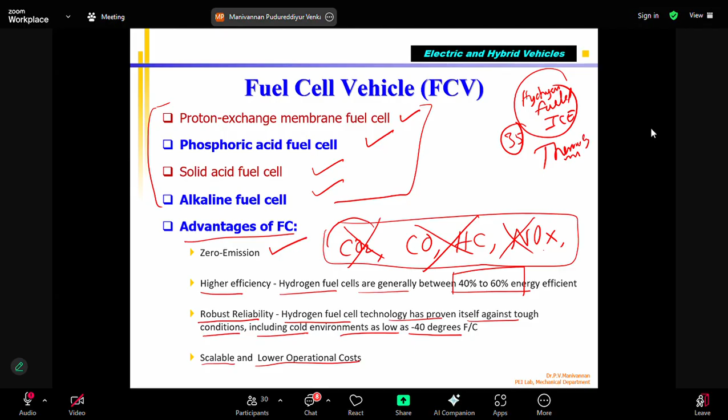If you increase the size of the fuel cell, the volume of hydrogen going in, you can produce more voltage, more current, bigger output. That's scalable - you can make it bigger. It also has lower operational cost compared to battery, considering maintenance and other things. These are a few reasons why people are trying to go to fuel cell compared to battery based electric vehicles.

Please note I gave 4 or 5 positive points, but there's a lot more to consider. In the universe, nothing is completely good, nothing is completely bad. When we say someone is good, say out of 10 points, 6 or 7 are good, 3 or 4 are bad, then we say that person is good. If someone has 8 good qualities and 2 bad, we say he is very good. No person will be completely bad with zero good things, all 10 bad, and similarly no one has all 10 good with no bad thing. You won't find anybody like that in the world.

But when more good things are done, we grade it: good, very good, excellent, something like that. Even excellent fellows still make 1 or 2 mistakes - maybe 8 or 9 good things, 1 or 2 mistakes. Similarly, any technology, whether battery, fuel cell, or IC engine, has good things but also has limitations. We'll see those limitations later when we talk about fuel cells and batteries.

Now that we've talked about why we have to go for hybrid electric vehicles, and explained the reasons over the last 5 to 6 classes - internal architecture, layout, technical details - not just introduction but many technical layouts too. I'm saying this because in the exam you can expect questions on what we've talked about till now. The midterm exam is coming in the middle of March, so that's why I'm emphasizing this.

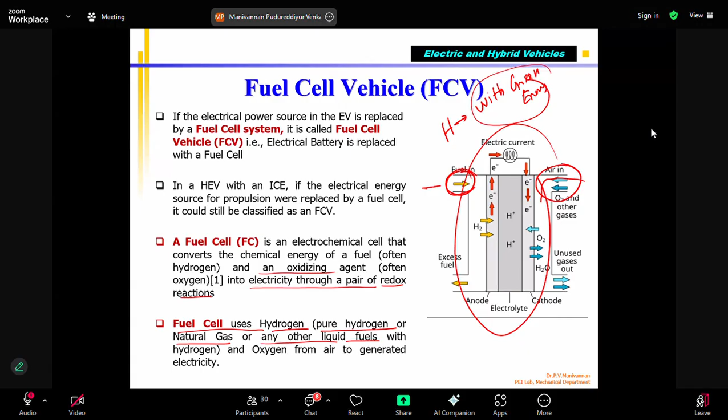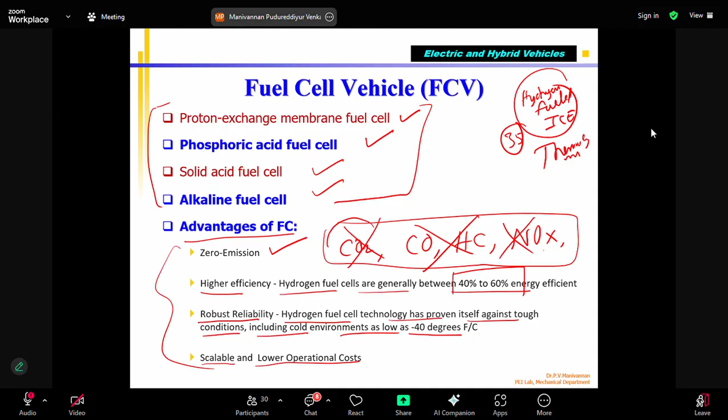Now I wanted to start diving deep into the modeling of electric vehicles, hybrid vehicles - how to find what should be the power, how much power is wasted, transmission, all these things one by one. First, let's talk about modeling and simulation, which has become very popular nowadays.

We saw this in the mechatronics course too. Modeling and simulation became very popular because making a physical prototype takes a lot of money, time, and effort, and something can go wrong during initial prototype testing. For example, with a nuclear reactor - if you don't control it properly during design, an accident can happen, emitting radiation that's dangerous for nearby cities for at least thousands of years. So they say nuclear reactor design should be done through simulation.

Now this is possible. Some 20 years ago, you did not have computers or software packages for this. Now think of bigger aircraft - new aircraft, bigger machines. Making a physical model may take too long. As I told you in mechatronics, for example the A380 Airbus, or Boeing 777, 787 - for the last 20 years, new designs are done through modeling and simulation, which we call the mechatronic way of design. Every component is modeled using mathematical equations, and you run the program - what we call simulation - vary the parameters, optimize the design. Only when everything is okay do you make the physical prototype.

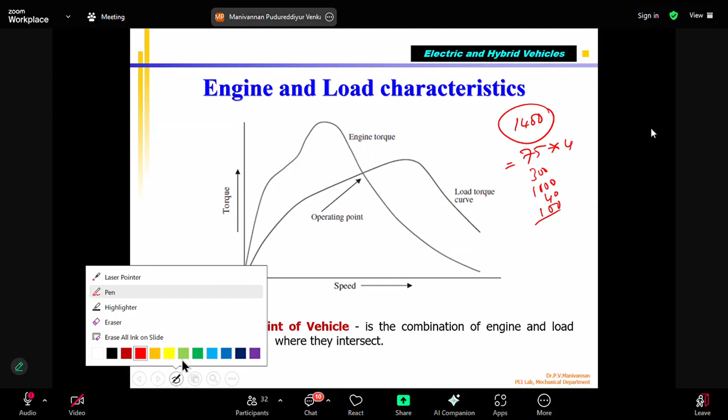We are talking about the mass of the vehicle, due to which there is an inertial load acting on the 4 wheels, multiplied by gravitation. That is going to happen.

Now, when we talk about the vehicle, who is going to drive it? The engine. The engine has to produce torque, and this is the engine torque, TE, which is trying to do this.

We know that as the throttle varies, engine speed varies. From 0 to 100% throttle, if I vary, my vehicle speed varies from 0 to 100 kmph. So as throttle varies, engine torque increases as engine speed varies, and engine torque is not constant, as we already know.

Similarly, the load torque. We already talked about various torques. These torques are also not constant.

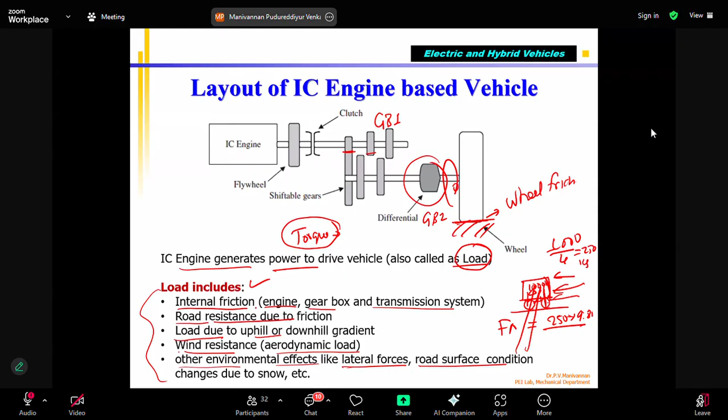For example, wind resistance or aerodynamic drag will be 0 when vehicle speed is 0 kmph. But static friction works, and engine friction works because the engine is still running, in idle condition or first gear, even though the vehicle has not moved.

When the vehicle is going on a plain road, the gradient torque is 0. Uphill or downhill gradient creates a load - uphill load is added, downhill load is reduced. Both are not always there. So these loads are not constant; they vary depending upon the environment, situation, and vehicle speed. It is not constant.

So that means the load torque also varies depending upon vehicle speed and road condition. You will see that it also increases and decreases.

Now, at a particular vehicle speed, both engine torque and the torque required to overcome the load meet. Engine produces torque, and this second curve is the torque required. They meet at a particular condition - this is called the optimal or operating point, the best point to run your vehicle.

But this condition is not always there because the vehicle itself is varying in speed, so it operates in different regions. The best point is where both curves meet - operating point of a vehicle is the combination of engine and load system curves, where they intersect. That is the best point, but the vehicle doesn't always stay there.

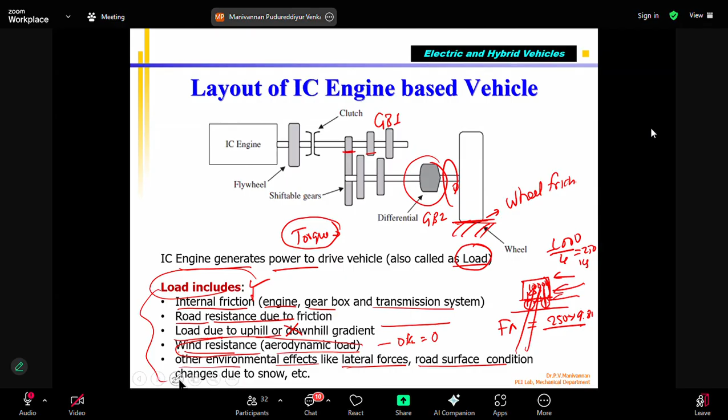This one is called propulsion loads, correct? When the engine moves only, friction happens, then only the vehicle is propelling. When the wheel is rotating, then only road friction comes, again propulsion. This wind resistance, all these things are called propulsion loads, correct? Plus this plus non-propulsion loads. All these things, vehicle body, all these things are called non-propulsion. Note down these points, together they are called propulsion load plus non-propulsion load.

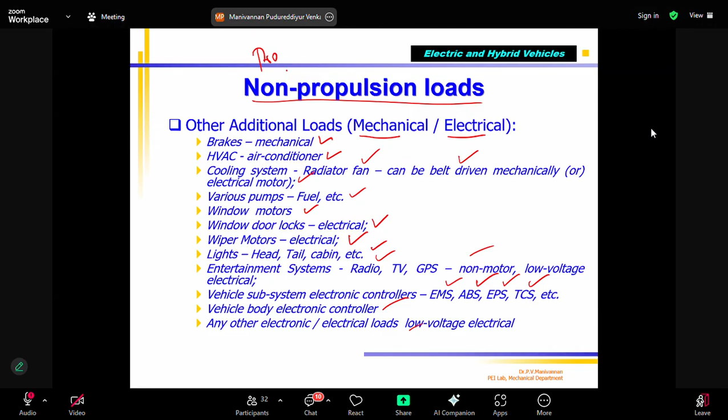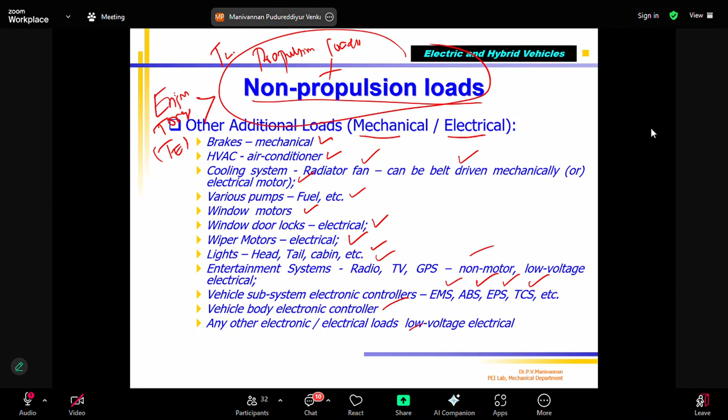Correct? Together they form the load and the engine torque. I call the torque by engine torque, TE, should be greater than the load torque. I say that torque TL, which includes propulsion loads and non-propulsion loads listed here. Correct? This is applicable whether it's a pure IC vehicle, an electric vehicle, or a hybrid vehicle.

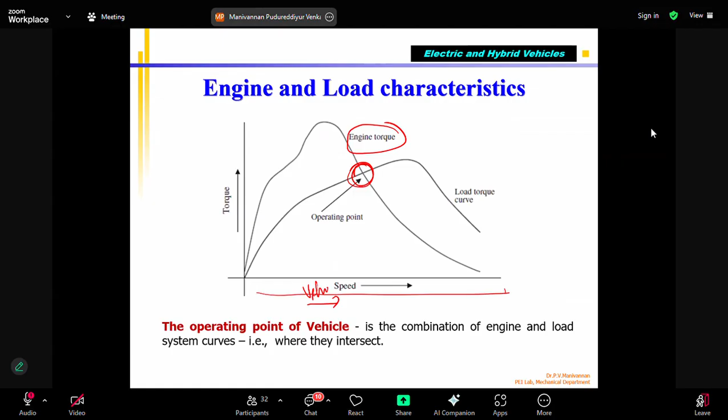Okay, then we also talk, whenever we talk about vehicle testing, all this, we are talking hybrid electric vehicle. What do you talk about? Drive cycles, right? So there are many drive cycles. A typical drive cycle is called the EPA drive cycle, which is used in the US, correct? We have Indian drive cycle, European drive cycle, Japanese drive cycle, each country has one.

That means we are testing the vehicle as if this drive cycle is trying to simulate the actual road condition. You drive your vehicle not at constant speed, correct? You will accelerate, decelerate, apply brake. That means basically by applying brake, you are reducing speed to decelerate. You run your vehicle at different speeds for different amounts of time.

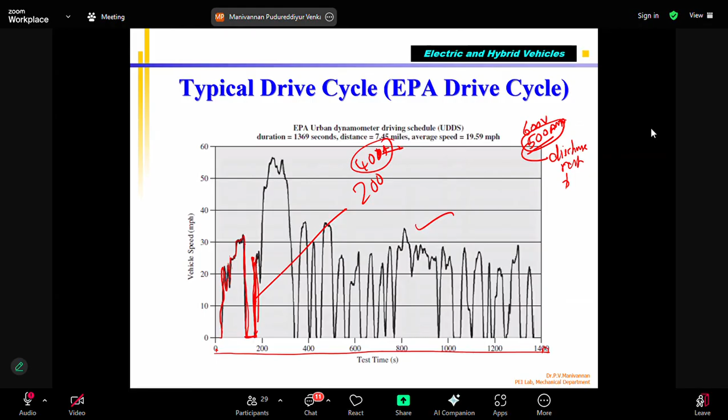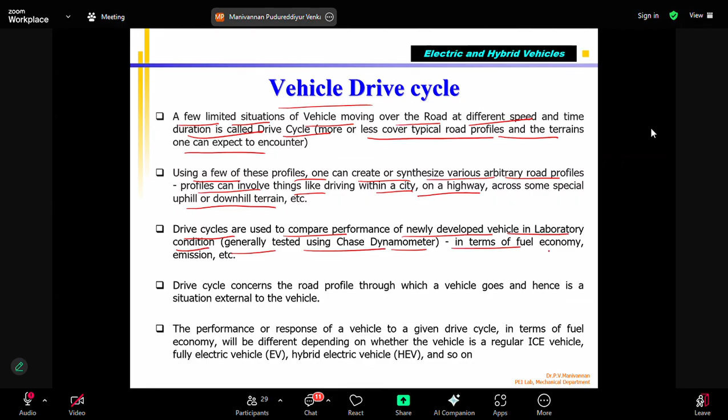You can see here, UDDS is there - urban dynamometer driving cycle. Other driving cycles can be created from one cycle to another, but you have to drive the vehicle in actual conditions and get the data - speed, time, all this - and from that you can synthesize and create the drive cycles. But that is done by ARAI or the EPA. They create all these things and give the drive cycle that can be used for this, driving on a highway, or inside the city where you apply frequent braking, frequent acceleration, complete stop at signals, and downhill - all these things. Drive cycles are used to compare the performance of a newly developed vehicle in laboratory conditions, generally tested using a chassis dynamometer, in terms of fuel economy and emissions. What for? To find out whether your new vehicle is providing the fuel economy expected, and whether emissions are reduced, as per the drive cycle.

A drive cycle concerns the road profile through which the vehicle goes, hence the situation is external to the vehicle. Please know that the drive cycle is only trying to simulate - this is what happens in India. An Indian drive cycle simulates Indian city and Indian highway driving - if you drive a vehicle, this is how you will apply brakes, accelerate, all those things you will do. That's what we are talking about.

That's what we are going to talk about. The performance and response of a vehicle in a given drive cycle, in terms of fuel economy, will be different depending upon whether the vehicle is IC engine based, electric, or hybrid. For the same drive cycle, different vehicles will give different results, because we know that an electric motor always gives higher efficiency, and its conversion is better than an IC engine. So that means automatically mileage will be better for electric than for HEV, and HEV will be better than the pure IC engine based vehicle. But all this can be tested and you can prove it.